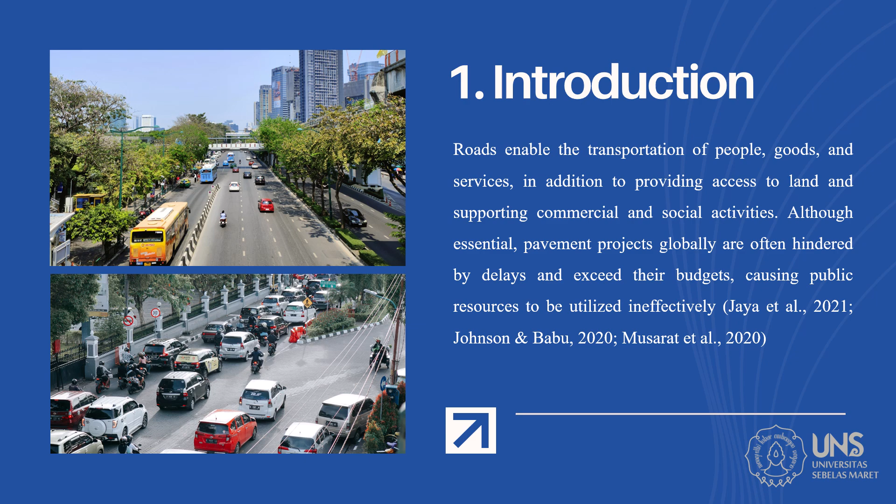Roads enable the transportation of people, goods, and services, in addition to providing access to land and supporting commercial and social activities. Although essential, pavement projects globally are often hindered by delays and exceed their budget, causing public resources to be utilized ineffectively. The Pameue – Genting Gerbang Road, a national unpaved road in Aceh Tengah Regency, Aceh Province, Indonesia, is an example of such challenges. This road connects Geumpang district with Takengon city and serves as a vital economic link. However, its deteriorating condition has made it one of the poorest maintained national roads in the region.

According to the Aceh National Road Agency, the road's unpaved road condition index, or UPCI, is 15.61, classifying it as requiring reconstruction. The UPCI, introduced by the Chilean Ministry of Public Works in 2007, provides an objective method for assessing unpaved road condition based on distress, drainage, and profile characteristics. As noted by M.Y. Shahin, roads with such a low condition index must undergo reconstruction to ensure safety and functionality.

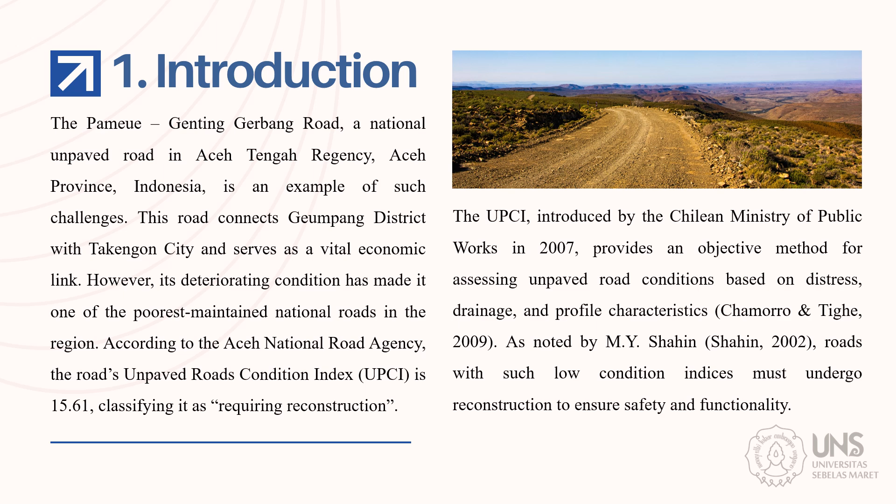Previous studies have analyzed the performance and life cycle cost of flexible and rigid pavement using life cycle cost analysis, or LCCA. Some studies have indicated that the life cycle cost of flexible pavement is lower than rigid pavement, whereas others have reported the opposite. According to G. White, while rigid pavement may be more cost-effective in the long run provided it doesn't require immediate and expensive reconstruction, flexible pavement is more economical in the short term.

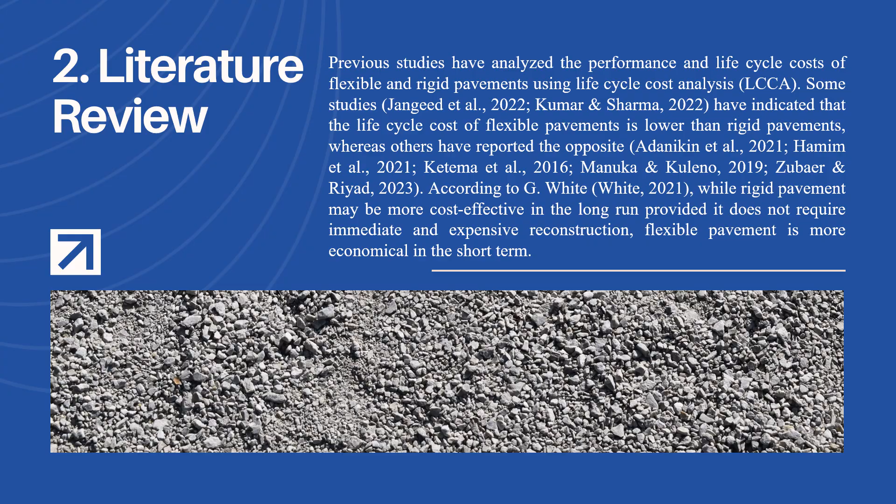Rural road networks are crucial for economic development, especially in developing countries, where they are key to transporting agricultural goods, reducing poverty, and enhancing access to essential services like markets, schools, and healthcare facilities. Given this challenge, this study aims to determine the most cost-effective approach for reconstructing the Pameue – Genting Gerbang Road. This study aims to provide insightful information that will help engineers and policymakers make well-informed decisions about the construction and maintenance of road infrastructure.

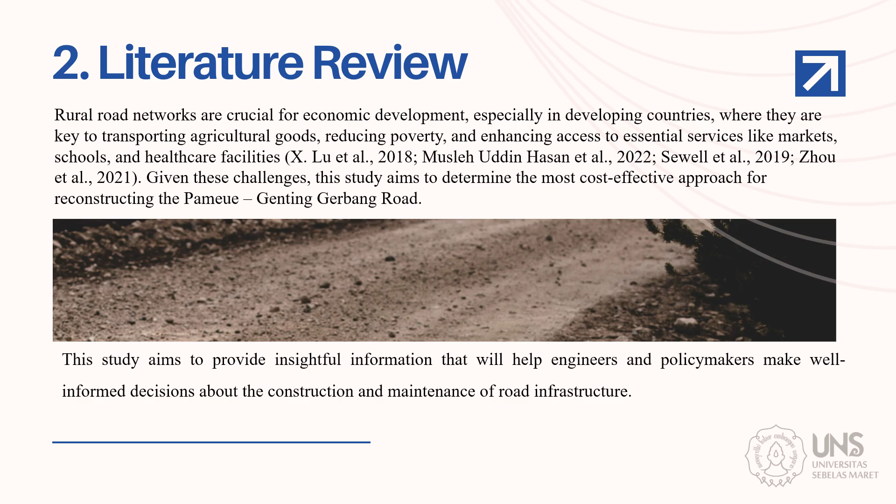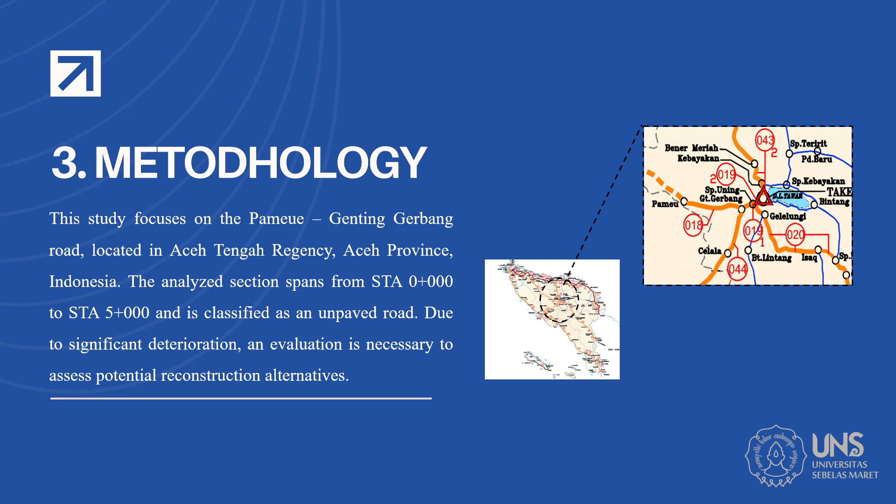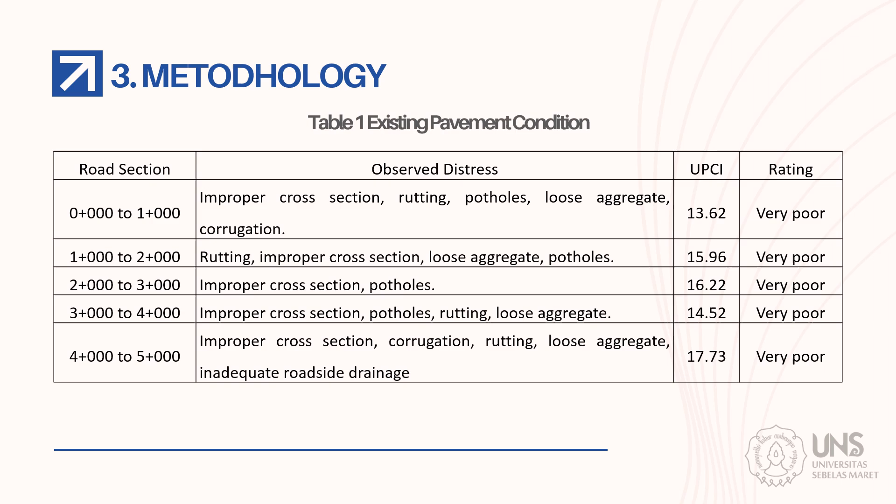This study focused on the Pameue – Genting Gerbang Road located in Aceh Tengah Regency, Aceh Province, Indonesia. The analyzed section spans from Station 0 to Station 5 and is classified as an unpaved road. Due to significant deterioration, an evaluation is necessary to assess potential reconstruction alternatives. The UPCI is employed to examine the condition of unpaved roads. The average UPCI value for the Pameue – Genting Gerbang Road was recorded at 15.61 and is classified as rating very poor. This dataset includes information on road classification, traffic growth rate, road width, number of lanes, pavement type, and pavement thickness, and the average annual daily traffic data.

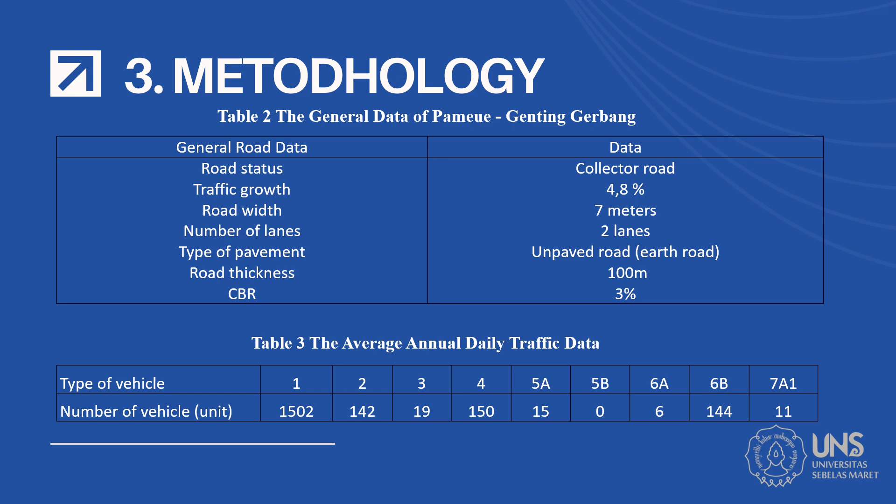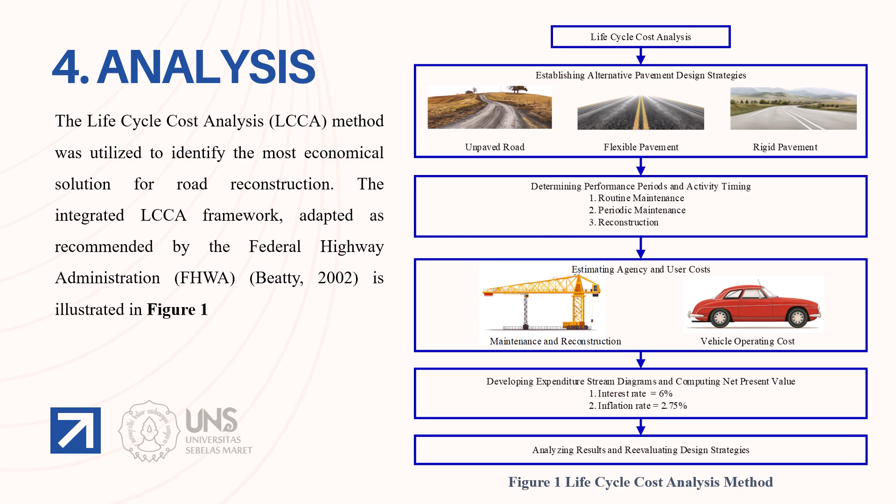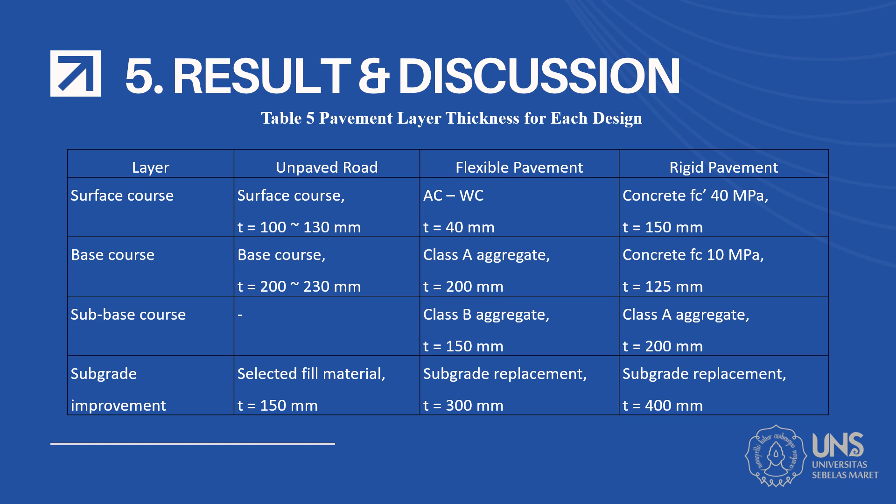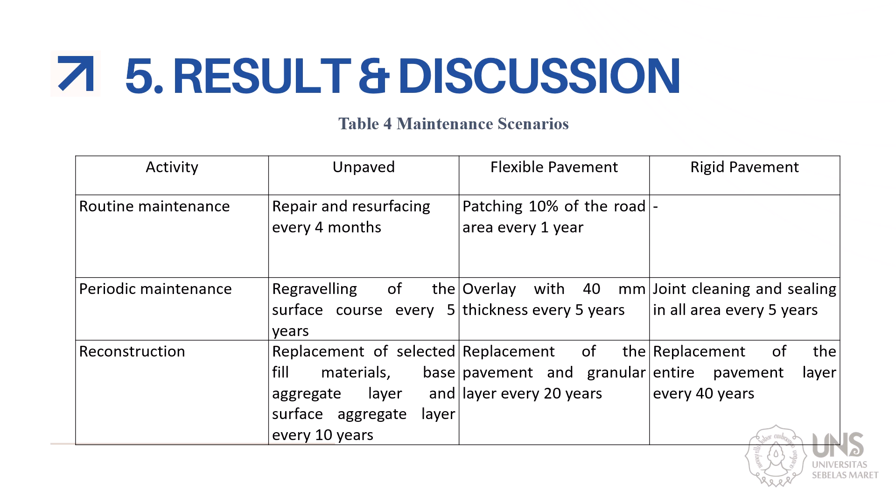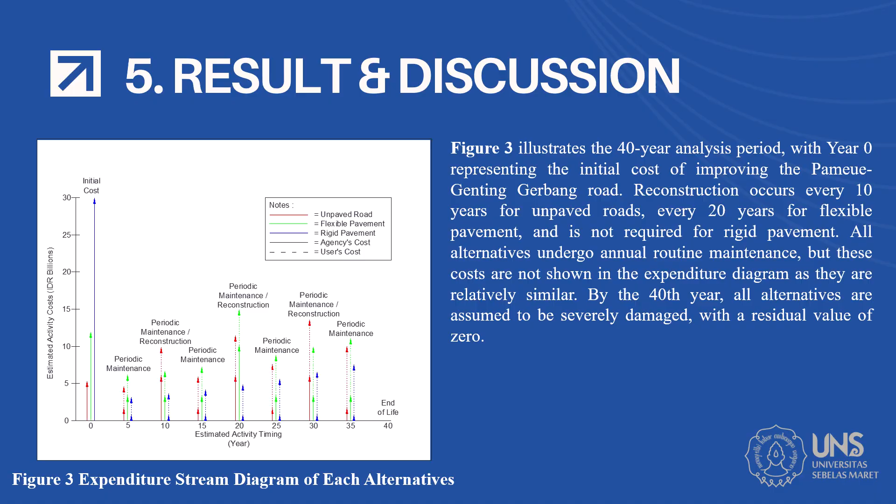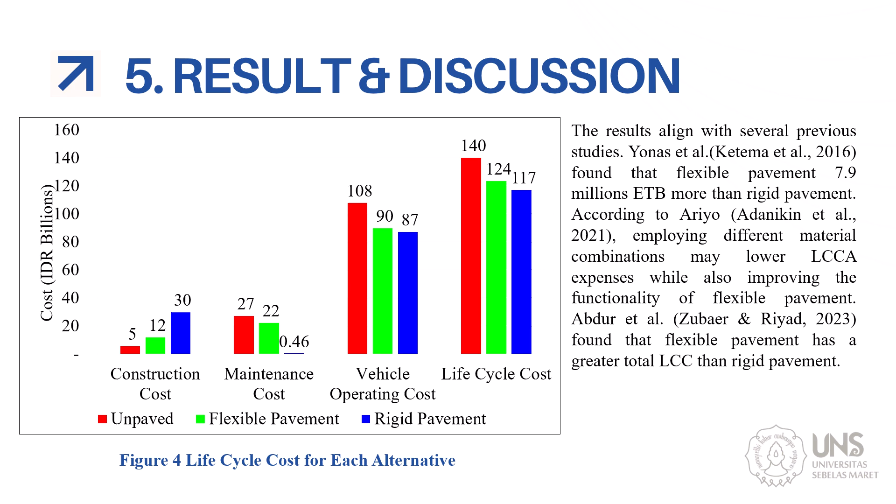The results align with several previous studies. Yonas found that flexible pavement costs 7.9 million ETB more than rigid pavement. According to Ariyo, employing different material combinations may lower LCCA expenses while also improving the functionality of flexible pavement. And Abdur found that flexible pavement has a greater total LCC than rigid pavement.

In conclusion, this study compares the life cycle cost of unpaved road, flexible pavement, and rigid pavement for the Pameue – Genting Gerbang Road. Unpaved roads have the lowest initial construction costs, within Indonesian rupiah 5 billion, but their frequent maintenance leads to the highest long-term costs. Maintenance costs are Indonesian rupiah 27 billion for unpaved roads, Indonesian rupiah 22 billion for flexible pavement, and Indonesian rupiah 0.46 billion for rigid pavement. Vehicle operating costs, or VOC, are also highest for unpaved road: Indonesian rupiah 108 billion compared to flexible at Indonesian rupiah 90 billion and rigid pavement at Indonesian rupiah 87 billion.

The total life cycle costs are Indonesian rupiah 140 billion, Indonesian rupiah 124 billion, and Indonesian rupiah 117 billion for unpaved, flexible, and rigid pavement respectively, with a cost ratio of 1 / 0.89 / 0.84. Given these findings, upgrading to rigid pavement is the most cost-effective solution, minimizing long-term expenses while ensuring sustainability. Future research should explore environmental and social impact, traffic growth, and maintenance strategies to enhance long-term road management and investment planning.